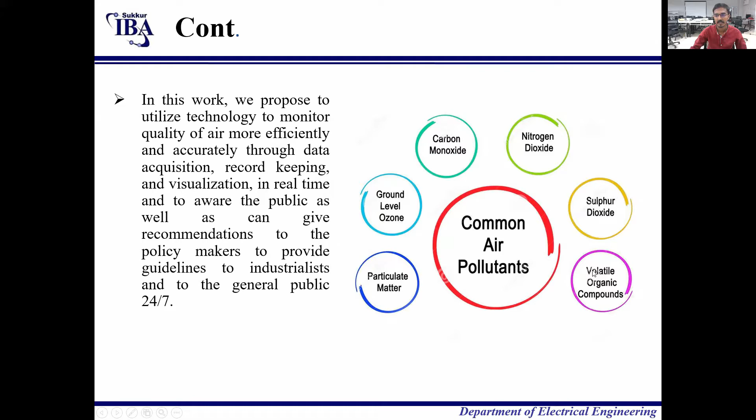Here is the problem statement: air pollution is one of the most serious problems in the world. Air becomes polluted when it contains substances which can have a harmful effect on the health of people, animals, and vegetation. Good air quality is essential for our health, quality of life, and environment.

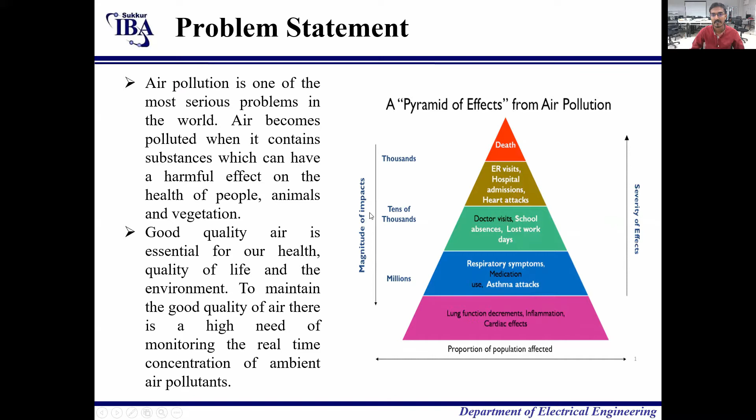To maintain good quality of air, there is a huge need to monitor the real-time concentration of ambient air quality. Here is the pyramid of effects from air pollution. As we go upward, the severity of the effects increases, and as we go downward from the top, the magnitude of the number of people affected by air pollution increases.

Here is the motivation of our project: the mission of this project is to design a real-time IoT-based air quality monitoring system to provide real-time information of ambient air quality to the public and policymakers, and to provide a tool to measure the concentration of hazardous air pollutants.

We need to help policymakers and the general public to continuously monitor the real-time air quality to ensure good air quality. The proposed system aims to develop an IoT-based smart system to monitor real-time air quality.

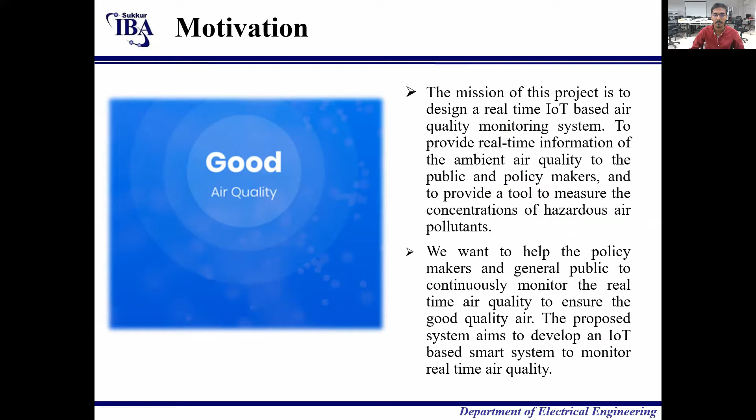The aims and objectives of our project are: the aim is to design a prototype of a real-time IoT-based air quality monitoring system. There are four objectives of our project.

The first is to introduce an open source and indigenous platform for development for environmental monitoring, to monitor concentration of air pollutants in real time, to monitor the ambient air quality at reduced cost, and to prototype a cost-effective, smart, and portable electronic device to monitor the quality of ambient air in real time.

Now, what is air quality? Air quality is the measure of how clean or how polluted the air is. Air quality is measured with the air quality index.

To guide the lay audience, which is the public, we use the air quality index to tell the public how polluted the air is, and the air quality index is used by government agencies to communicate with the public. The AQI table is used by agencies to tell the public about air quality.

Here is the table with values from 0 to 50: air is good. From 51 to 100, air is moderate. From 101 to 150, it is unhealthy for sensitive groups. From 151 to 200, it is unhealthy. From 201 to 300, it is very unhealthy. And from 301 to 500, it is hazardous.

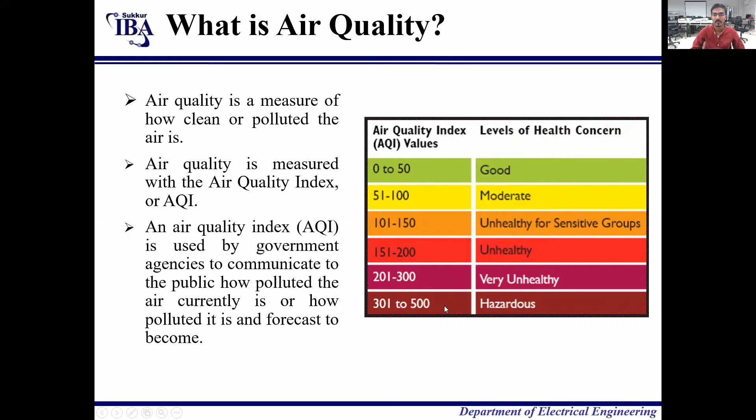Here is the formula that will calculate the AQI as a number, converting the concentration into the AQI. Here are the limits described by the American agency, also known as EPA, Environmental Protection Agency.

We use this table to calculate the AQI of the air. As we are measuring PM 2.5, here it ranges from 0.0 to 12, which falls in the category of good, with AQI between 0 to 50. We use this formula to calculate the AQI.

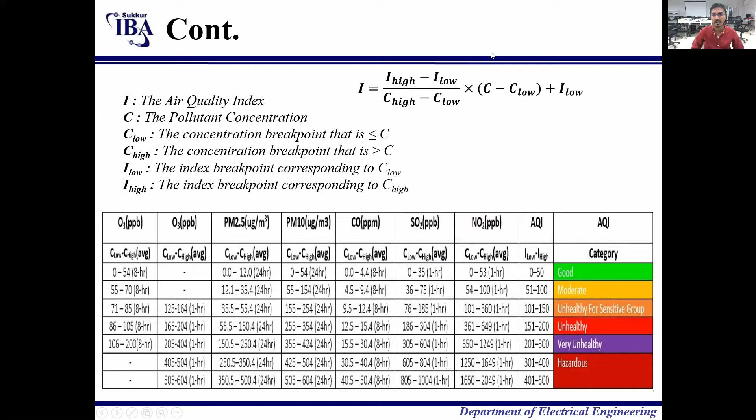Here is the literature review. After choosing this project, we had to do some literature review, so we studied several research papers. In the first research paper, I studied an IoT-based real-time Bolt-based indoor air quality monitoring system. The source of this research paper is the 2018 International Conference on Computation and Characterization Techniques in Engineering and Science.

The summary of this project: the system was developed using only one sensor, MQ135, interfaced with PIC 16F877A, a microcontroller, to receive and initially process the sensor's data. Then it is uploaded to Bolt Cloud via a Bolt Wi-Fi module. And here are the other research papers that we studied.

Now comes the methodology that we used in our project. We used DSM-501A, which is a PM2.5 and PM10 sensor, also known as a dust sensor. We use MQ7, which is a carbon monoxide sensor. We use DHT11, which is a humidity and temperature sensor, integrated with the ESP32.

ESP32 has a built-in Wi-Fi module. Through that Wi-Fi module, we send the data to the ThingSpeak cloud. From the ThingSpeak cloud, we also send the data to the mobile application. Now, the sensing node. There are 4 steps we used in our project. The first one is the sensing node.

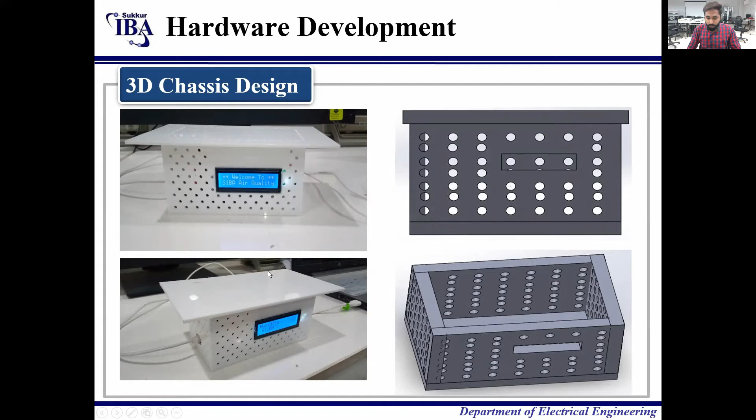Hardware development. First of all, the 3D chassis. This is the SolidWorks design, side view. This is the top view of the SolidWorks design, and this is the final product, which is 3D printed in the fabrication lab. This is the top view and the front view of our hardware chassis for the proposed system. Next, the PCB design.

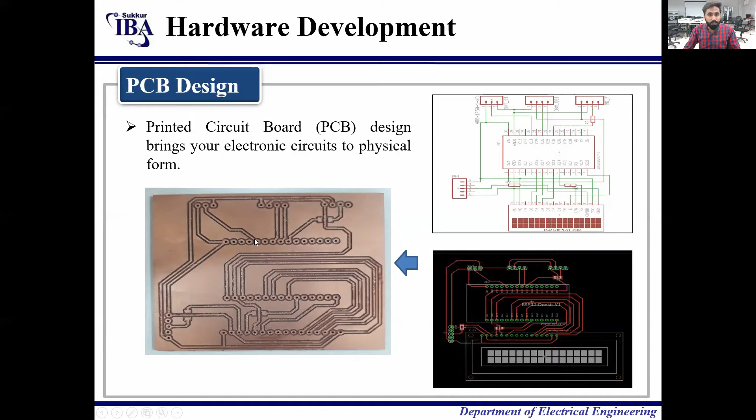This is the schematic for the printed circuit board of our proposed system, and this is the routing board of our proposed system. This is the final printed board for the circuit of our embedded system. Now, the embedded system is comprised of the sensors interfaced with the microcontroller unit on the printed circuit board, soldered to make the wired connections between the microcontroller unit and the sensors.

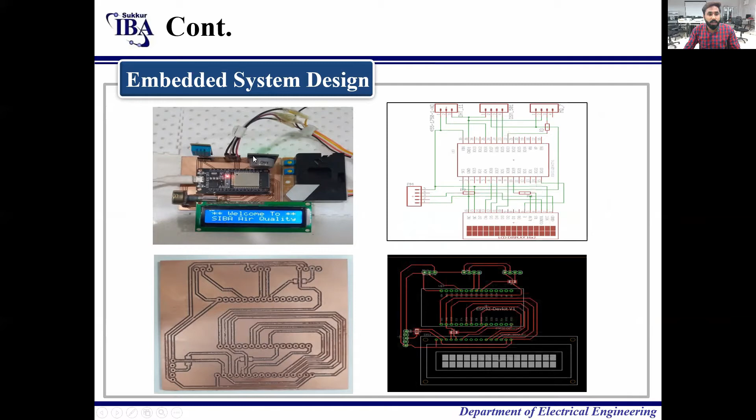Next are the results and discussions. First of all, we will discuss the temperature and humidity sensor which we have used in our embedded system. DHT11 is a low-cost digital sensor for sensing temperature and humidity. This sensor can be easily interfaced with any microcontroller such as Arduino, Raspberry Pi, etc. to measure the humidity and the temperature

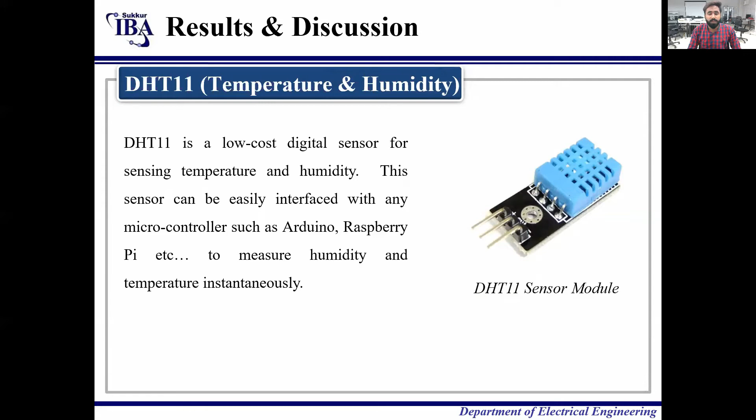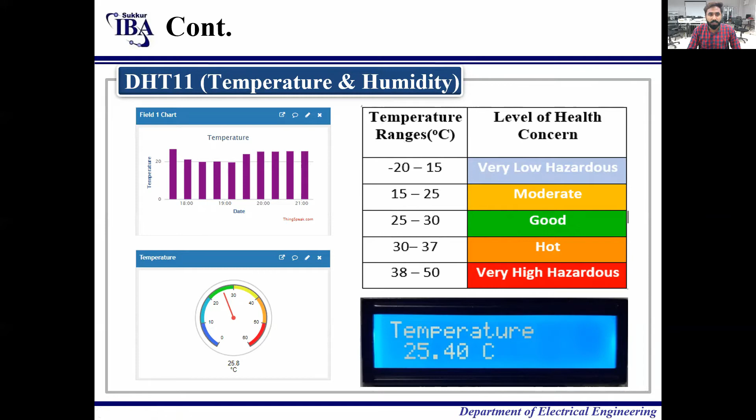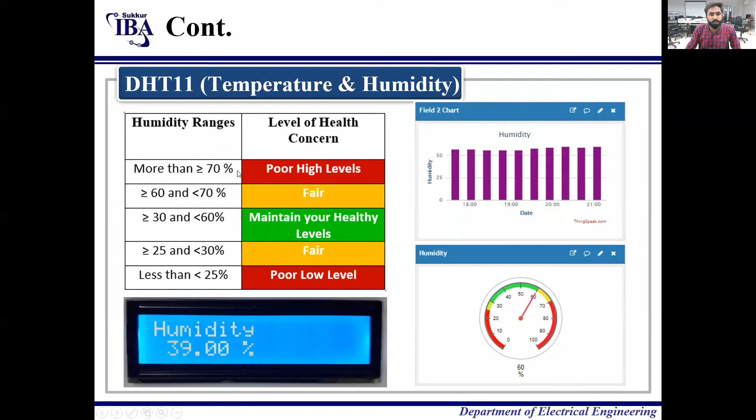Next is the humidity. This is the history of humidity recorded on the ThingSpeak IoT dashboard, this is the gauge value of real-time humidity, this is the value on the LCD, and these are the healthy ranges for humidity defined by the environmental protection agencies.

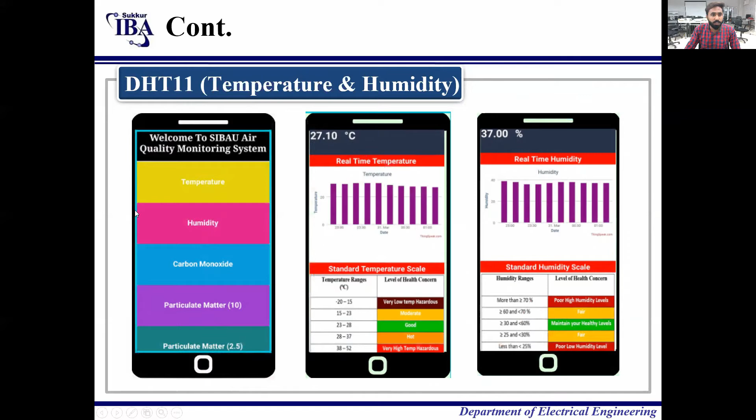Next, the MQ7 sensor, which is a carbon monoxide sensor. This carbon monoxide gas sensor detects the concentration of carbon monoxide in the air and outputs its reading as an analog voltage. The sensor can measure the concentration from 20 to 20,000 ppm. It is highly sensitive to carbon monoxide gas. This is the carbon monoxide gas sensor MQ7 sensor module.

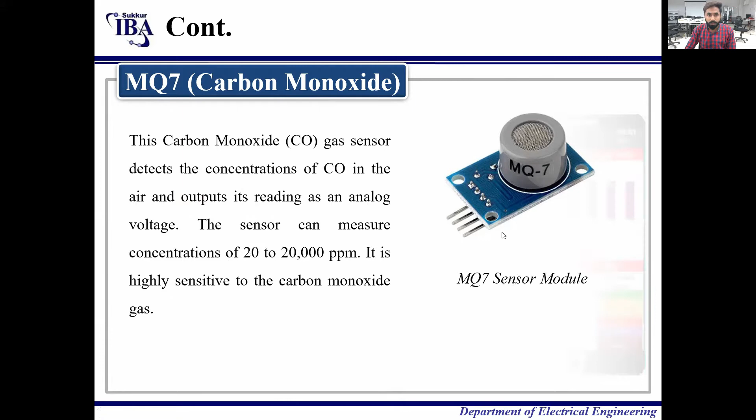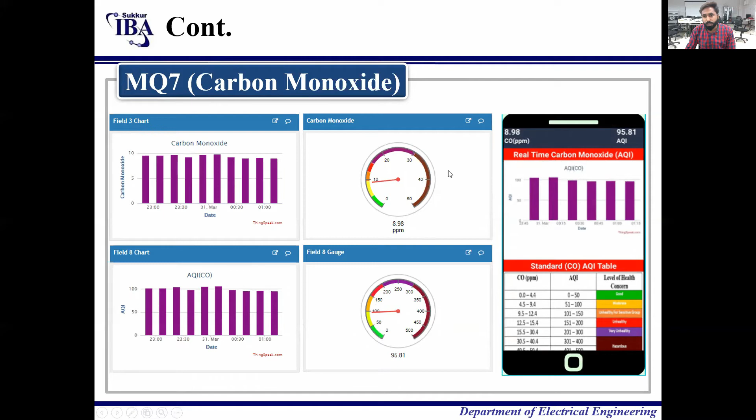These are the results we get from the sensor, and these results are on the ThingSpeak IoT dashboard. This is the AQI value calculated from the real-time concentration of carbon monoxide. This is the interface of the mobile application. We can monitor the same values of carbon monoxide on the mobile application as well as the IoT dashboard.

The next is the DSM-501 sensor, which is also known as a dust sensor, also known as a PM2.5 and PM10 sensor. DSM-501 is a sensor module which can detect dust concentration. The dust sensor detects fine particles as small as 1 micrometer and measures the quantity of floating particles in a room space up to a maximum of 30 cubic meters of volume.

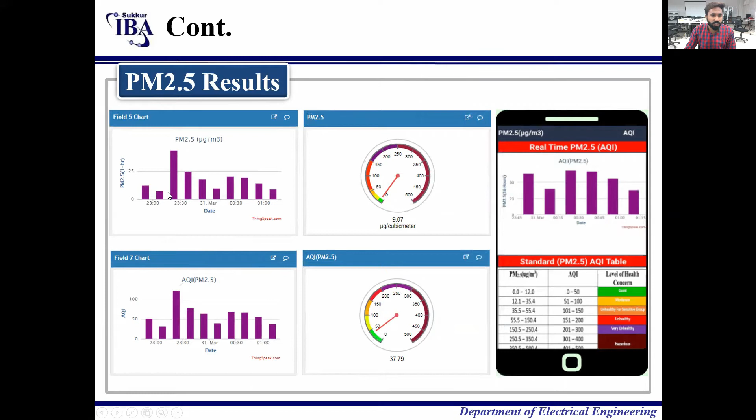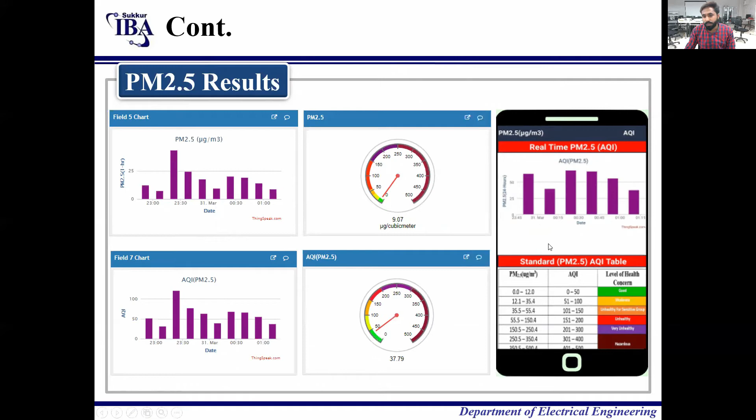The next is the PM2.5 results. These are results on the IoT dashboard, real-time concentration history at different times, and this is the calculated air quality index value from the real-time concentration. This is again the mobile application interface for our project.

Now let's move to the conclusion and future work. In conclusion, the system is going to be an important tool for real-time monitoring of the quality of ambient air. The designed system consists of the particulate matter sensor DSM-501, carbon monoxide sensor, and temperature and humidity sensor DHT11. A 16 by 2 liquid crystal display, LCD, has been integrated with the ESP32 microcontroller development board.

The programming is done in the Arduino IDE for interfacing the sensors with the ESP32 microcontroller development board for the purpose of data acquisition. The mobile application has been designed in MIT App Inventor, which is a free mobile application development platform. A web-based IoT dashboard has also been designed in the ThingSpeak IoT platform for better visualization of the outputs of the hardware setup. Now, move to the future work.

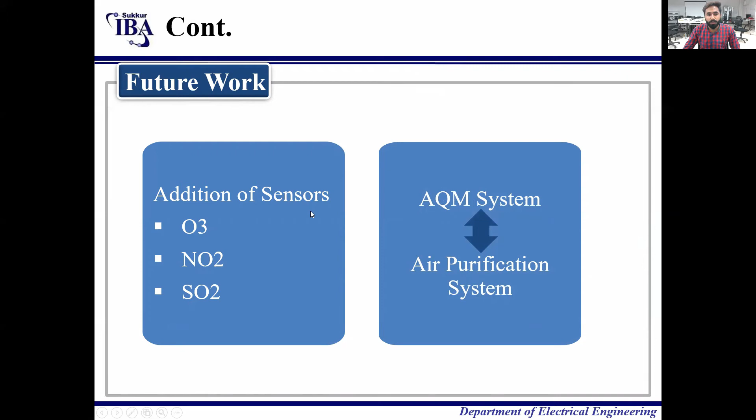In the future, we want to add sensors, such as a ground-level ozone sensor, NO2 sensor, and SO2 sensor. We want to add these sensors to our previously designed system. And also we want to combine the air quality monitoring system with an air purification system. The system will become more robust for air quality monitoring as well as for controlling the quality of indoor air at any place.